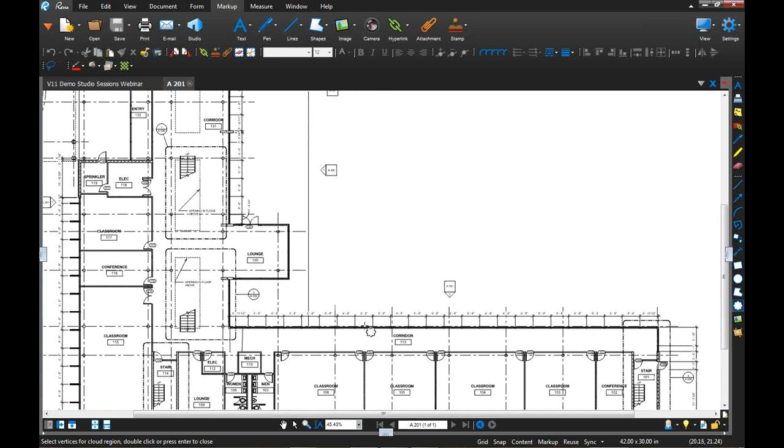Within my markup menu, I'm going to select my cloud tool, and zoom in and out of my drawing. With the wheel of my mouse I'm scrolling up and down, and if I click and hold the wheel, I can pan anywhere on my document. So I'll zoom into this corner of my drawing, click, drag and hold, and place my cloud.

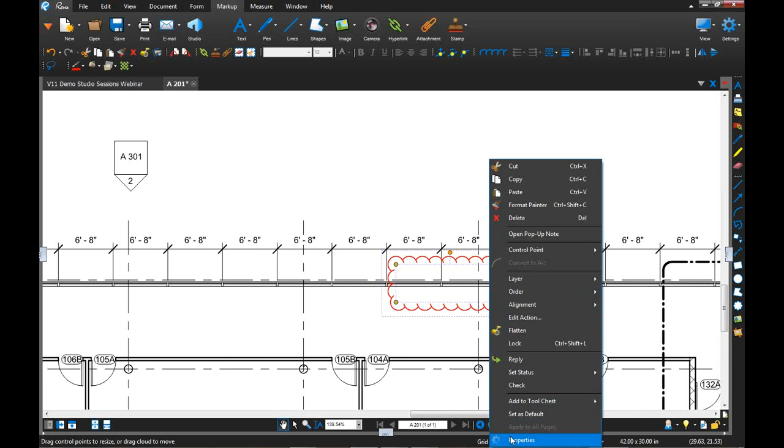I can easily change the attributes of my cloud. I'll right-click and open up my properties panel, which opens on the right side of my screen. I'll pull this out a bit more so you can view it. I can change the appearance color from red to a nice navy blue, and change the fill color to a nice canary yellow.

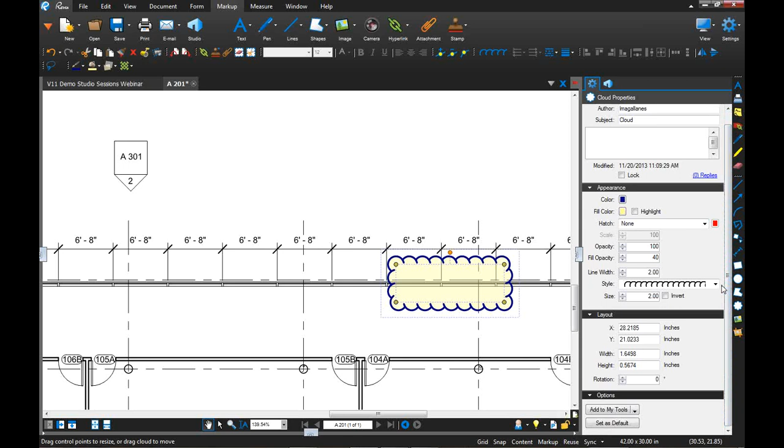But I also notice as I'm changing the attributes that the fill color is too strong, so I can change the opacity percentage. I'll click the down arrow and bring that to about 40%, so it's still eye-catching, showing there's a call-out here, but the viewer can still see the information underneath the cloud tool itself. I can also change the line width to make the blue line thicker, and change the style of the cloud as well.

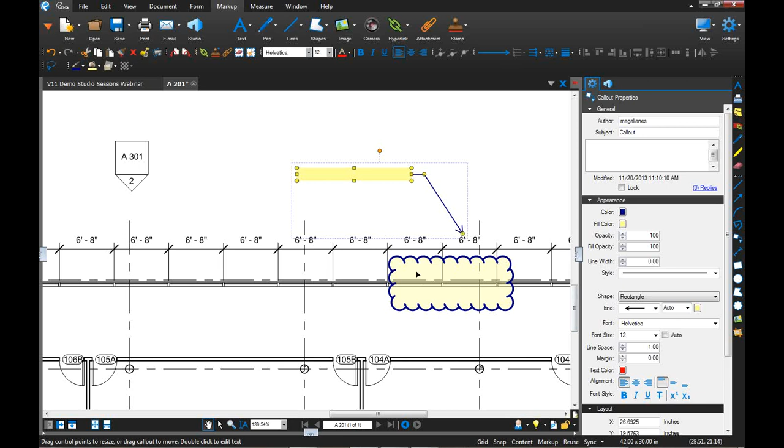Now that I created these tools, I can give them a group subject. I'll select my lasso tool, which happens to be my favorite, and change the subject name - just for this sample, we'll call it structural. Since I already did that before, it autofills for me, so I can just select what I just did.

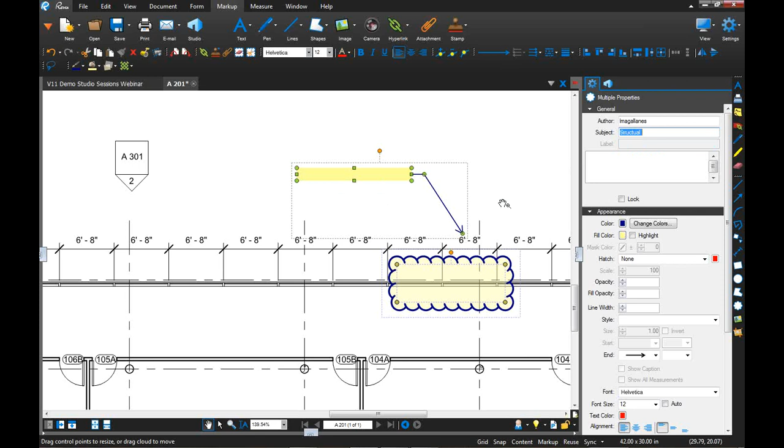Once I've selected them, I can right-click and add them to my tool chest. Let's say I want to add them to my engineers team tool chest, but I don't have one for engineers, so I can create one first before placing that markup on my tool chest.

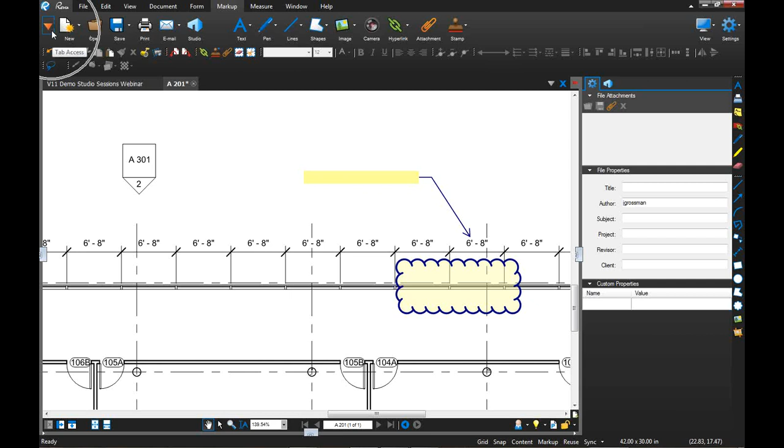I'm going to go into my Tab Access up here and click to open my tool chest, and notice how that opens up on the left panel of my screen. Then I'm going to go into my Manage Tools.

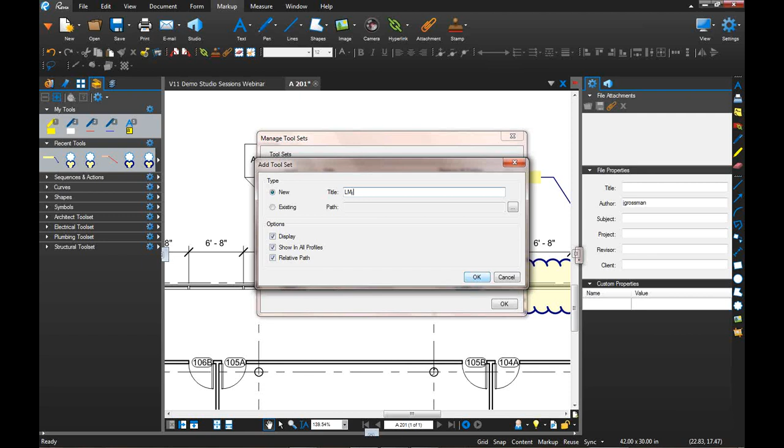These are the tool sets I already have existing, which you can see in my panel. So I'm going to go ahead and add my own tool chest, and I'll name it LM Team as an example. Then I'll click OK.

I'm going to save that to my local or C drive. Now notice that the LM tool chest has been added onto my tool sets, and you can see it here at the bottom of the dialog box.

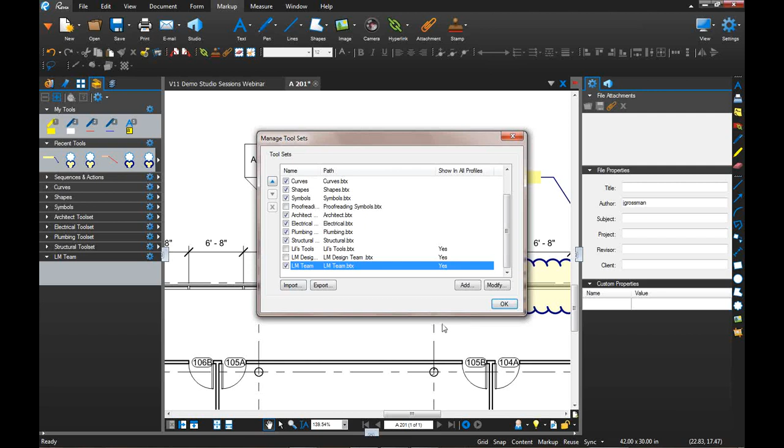I can also share the same tool chest. If I highlight on that tool chest, I can export it and save it to my local or C drive, then email the team to let them know it's located on drive P under folder tool chest. Once they have that information, they can open Revu, go into their Manage Toolsets dialog box, and click Import to bring that tool chest into their Revu. Now that I've created a tool chest, I'll click OK.

Now I'm going to add the markups I created a second ago and place them right into my tool chest. So I'll click on my markup to activate it, and now with my Properties panel open on the right side of my screen, I'll go down to the bottom where I have the option to add to my tool.

I'll click on the down arrow, and now I have that tool chest I created called LM Team. I'm going to add that to my tool chest. If you notice on the screen to my left, that markup is now placed in that same tool chest.

Also, if I created some markups, you'll notice I have a recent tools section. One thing to note is that the minute you close the session, the recent tools will go back to a clean slate. So if there are any tools or markups you're creating that you want to continue using, the best thing to do is create your tool chest and click on that markup to add it there.

So now you saw me add a markup either by right-clicking and adding to my tools, or by actually dragging it from my recent tools all the way down to my LM Team tool chest.

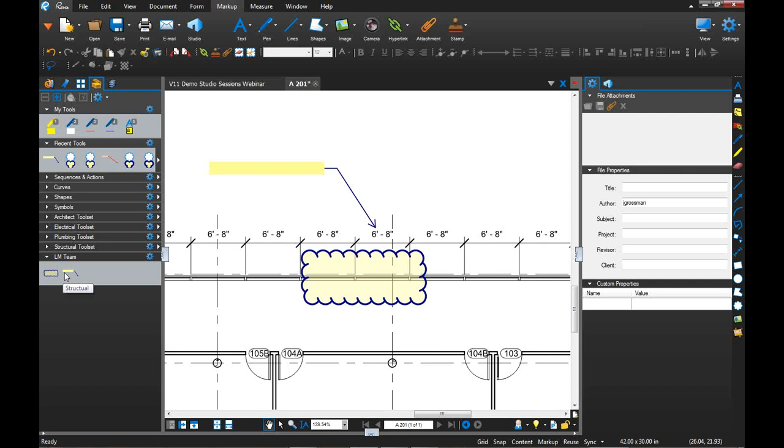Now I'm actually going to save this tool chest to my profile. I'll go back into View, and I'm in my design profile, so I'll go ahead and save it. The profile is a place where you can store, standardize, and set up your configured environment, and add any dependencies you might have linked. It also helps keep everything standardized in a uniform way.

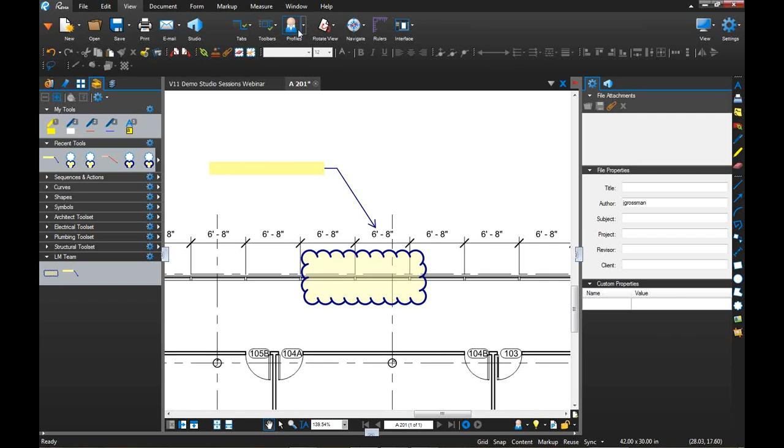So let's go back into profiles here, which is the little profile manager with a bow tie and a blue sweater. If I click on profiles, I can create my own customized profile. I'll click on Add, and we're going to name it LM Design Team Profile, then click OK.

Now you'll see it has populated itself on my profiles list, and it's actually alphabetized that for me right away, so it's in between my estimation and my office profile. I also have checked off to include dependencies, so if I share that with other team members, everything stays linked together.

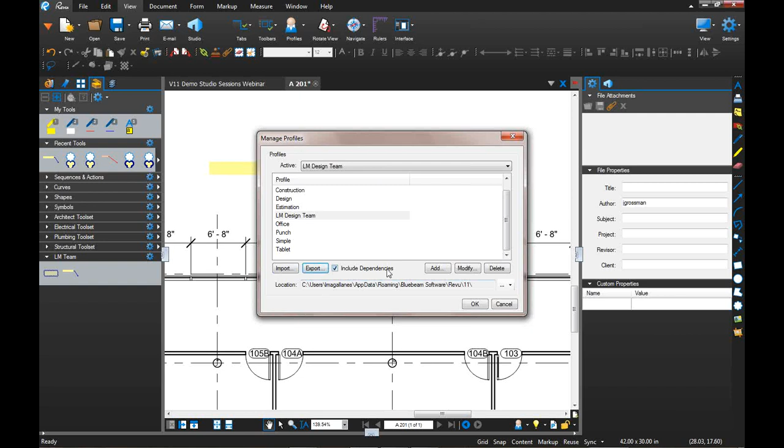Similar to the managed tool chest, I can export this profile and save it to my local or C drive. The other party will then come into Revu, open up their Manage Profiles dialog box, and import that profile into their Revu. Then they can click OK, and now I have that profile checked on currently.

So now we're actually going to go ahead and take a look at our markups list, which I'm going to open up from the blue knob here at the bottom panel. I'm going to click and drag it open. So I have these markup lists, and what you see so far are the markups that I've created so far along this document.

Think of the markup list, if you're familiar with Excel, as having columns and rows that you can work with. With Excel, you have a lot of flexibility with moving things around, very similar to your markup list.

So if I want my status to be placed towards the end of my markup list, I can grab on that status and just drag it over, very similar to Excel. I can also create my own custom columns and add my own formulas, again similar to Excel, where cell A1 multiplied by B1 gives me my sum in cell C1.

Just something to give you a little bit of something familiar. Here I can actually go ahead and display certain columns. So if I want to display my area column, notice how it's populated on my markup list here. And I can turn those on and off anytime - click it one too many times, and I can just turn that off again.

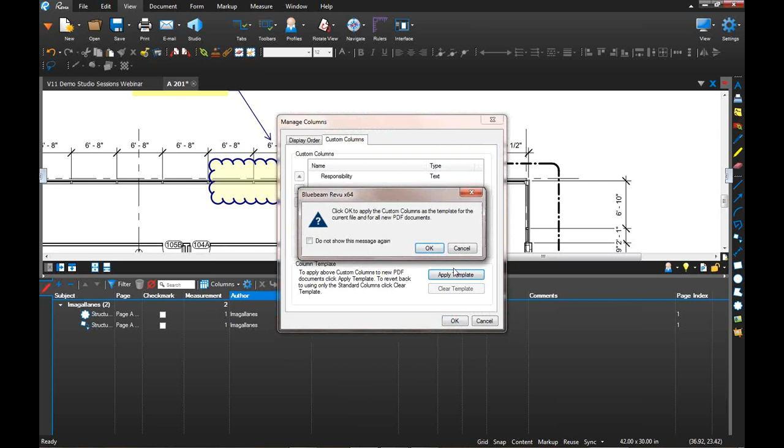So now that I'm here, I can actually apply this template to show in every new session that I have in Revu. I'm going to click OK. So every time I actually come to Revu, however I displayed all my custom columns and statuses, it would actually show for each new session of Revu. So I'm going to go ahead and click OK.

So now I'm going to look at, since I'm going to have a couple of people review this, I want to make sure I've set some of my statuses as well. I'm going to click on my Manage My Statuses. I already have two existing in my Manage status: Review and Migration. Under Review, I have the states accepted, rejected, canceled, completed, or none. For Migration, I have not confirmed, confirmed, and none.

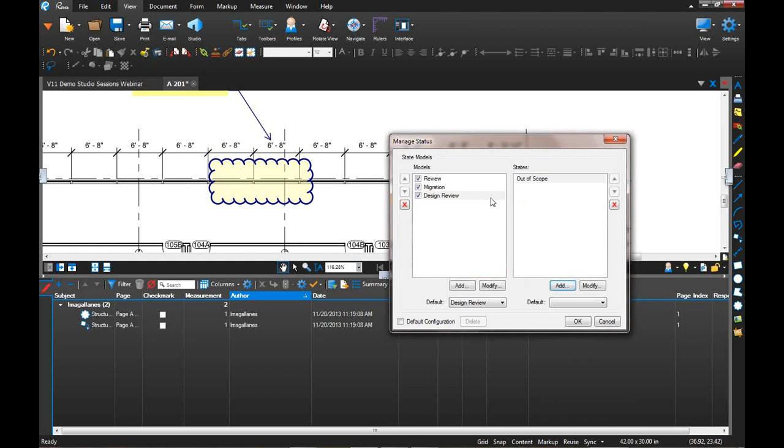But I want to go ahead and add a new one, so I'm going to click on Add. We're going to name this Design Review and click OK. And for Design Review, I'm going to add a state of out of scope, and then click OK from here. Then I'm going to check off the default configuration, and click OK after that.

So now I want to make sure those statuses are actually working within my markup list. I'm going to click on the status column, double click, and now I have that Design Review custom status that I just created, along with my out of scope state.

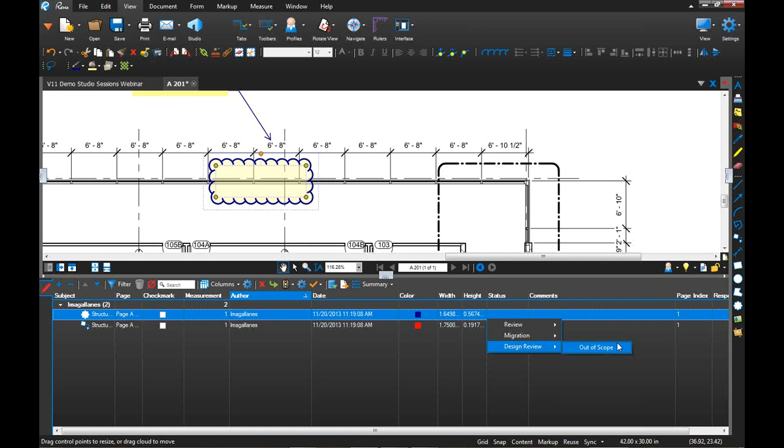So now we're ready to move into Studio. Once we have all our custom columns, statuses, and discipline-specific tools ready and set to be distributed to the team, we're going to jump into Studio, Bluebeam Studio.

We're going to go into the Studio icon, located on the top of my command bar. It's a blue box with a door opening. I'm going to click on that, and my Studio opens up on the right panel of my screen. We're going to start a new session.

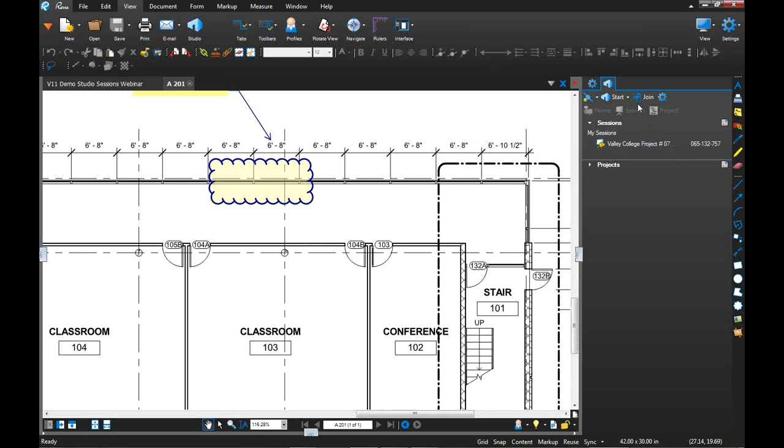I'm going to click on Start, New Session. You can go ahead and name your session, so I'll name this Design Review as an example. I'm going to add my files—not my slide file, but the sheet that I've already been marking up.

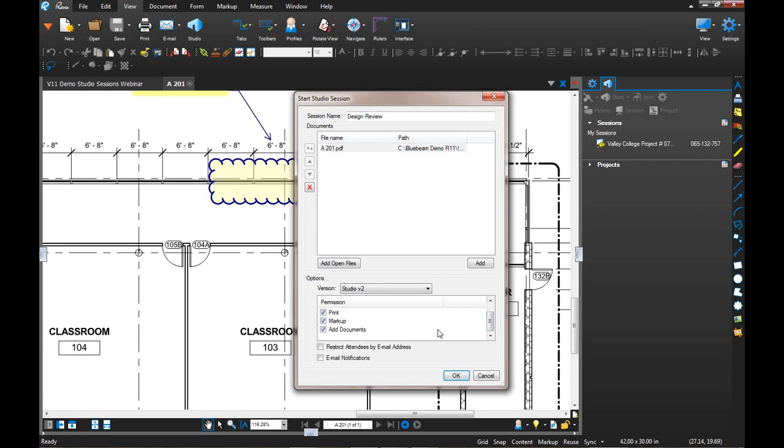From here I can set all my permissions. Let me open up the screen a bit more so I have the options to set permissions. I can allow attendees to save as, print, or mark, and I'm also going to allow them to add documents, but the choice is up to you to change those permissions accordingly.

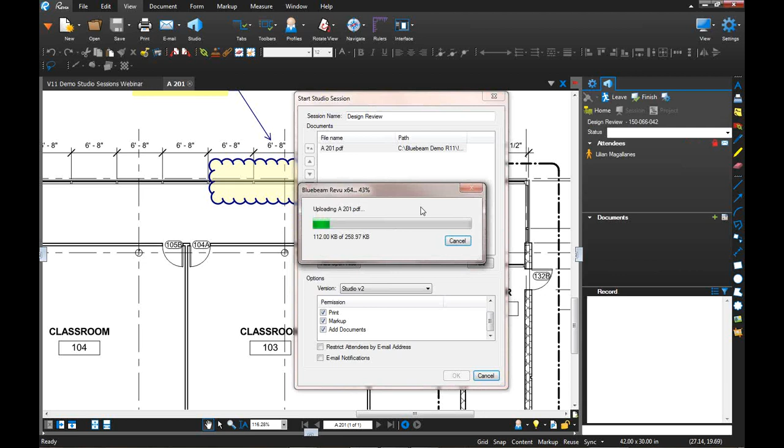Once I click OK, now that I have my files uploaded and permissions adjusted, I'm going to click OK. One thing before that—I can also restrict attendees by email address; in the next screen I'll show how that looks. But in this case, I'm not going to restrict anyone, so I'll click OK and it uploads the file.

From here I'm going to invite my attendees. In the previous screen, if I had restricted by email addresses, only those populated emails would be able to join the session. Think of it as a guest list—if they're not on it, they don't get in; if they are, they can jump into your session.

For this example, we're going to add an address. Since Steve Jones is here with me, I'm going to add him. I already had him saved because I had invited him before to a different Studio session. So I'm going to click OK.

I can go ahead and add as many attendees from here—up to 500 attendees. And I have the option to upload up to 100 files, no more than 100 megabytes each.

Once I've added my attendees, I can add a customized message. I'm going to say, 'Hi Steve! Can you please review these drawings?' with a nice sideways happy face. Then I'll click OK.

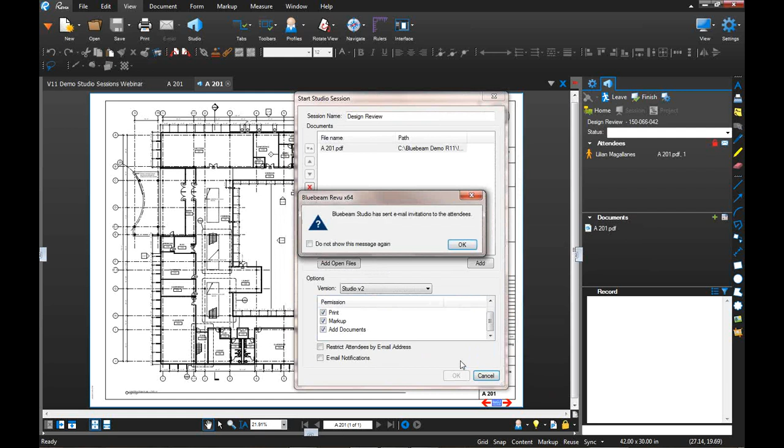So I click OK, and that invitation has been sent out to Steve. Now we're right into that Studio session, as you see here. But we already have a session that we started before, so we're going to jump into it since we have some activities on there already.

So I'm in this session called Valley College Project number 07134-10, B as in boy. I have here my session ID number, I can view that here. I can see all the attendees who have jumped into my session, and I can also see that our electrical, mechanical and plumbing guys have already jumped into the session.

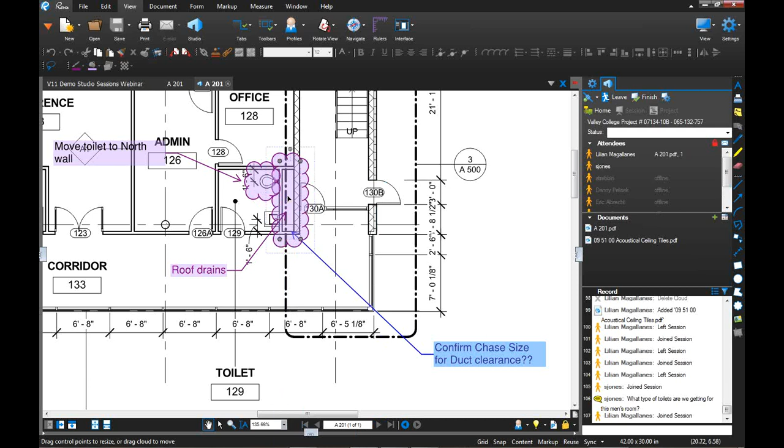If I zoom into one of these markups and I click and highlight it, you'll notice that it has those gray dots at each corner. I can't do anything with those markers, I can't move it, I can't enlarge that cloud. Something to note is that I cannot edit anyone else's markups but my own.

So if I create a cloud here, notice how they have those yellow dots. I can go ahead and change and reconfigure that cloud any way I like, and I can delete it if I want, because those are my markups. But anyone else's markups placed here in the studio session, I cannot change at all whatsoever.

Below here I have my record, so it gives me a record of anyone who came in and what activities they did while they were in the session. So say, for example, I see that Steve Jones was here earlier, and he's asking me a question.

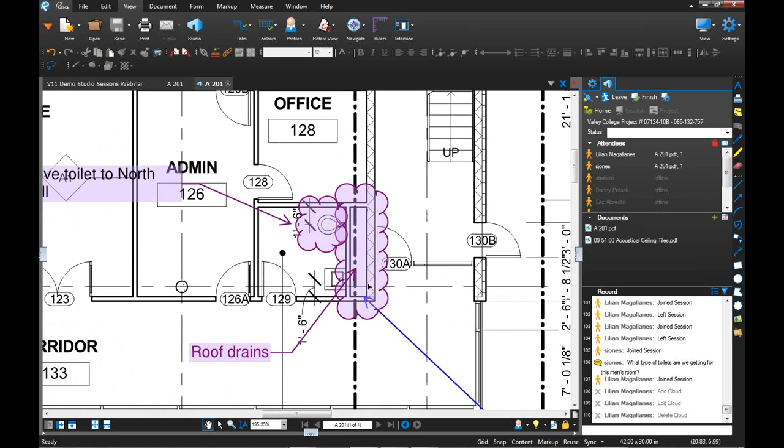What type of toilets are we getting for this men's room? If I zoom in, I'm seeing right away there's a toilet here, but it's not really a men's restroom. But I can click on that comment he made, and at the very moment he asked the question in the record box, it zooms into that location where he was posing that question. So it truly does give you that relevance of where they were, in that very place and time.

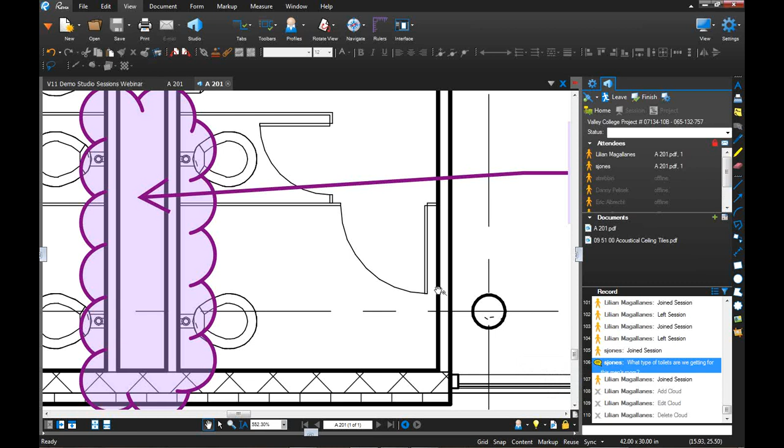So I can go ahead and leave the session. I'm sorry, I don't want to leave the session just yet, there's so much more to do here.

I saw Steve's markup, but I can also see that Steve is on the session as well. I can see that Danny and Eric have been in the session, but they're no longer here, because as I'm hovering over their names they've been grayed out. But I can see that Steve is actively on the session now, because his name went from that grayed out font type to white.

Notice as I hover over, I have these orange feet, and that tells me I can go ahead and follow him within the studio session. So if I click there, I am not touching the keyboard or the mouse. What I'm seeing at the moment is Steve actually reviewing the drawings himself, so I'm actually virtually following him at the moment.

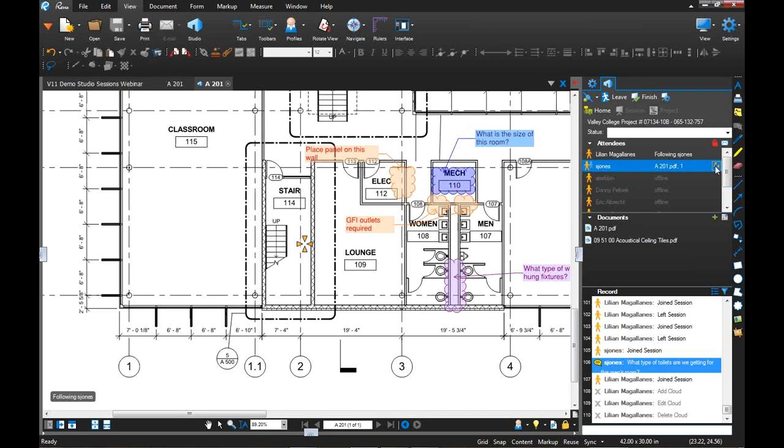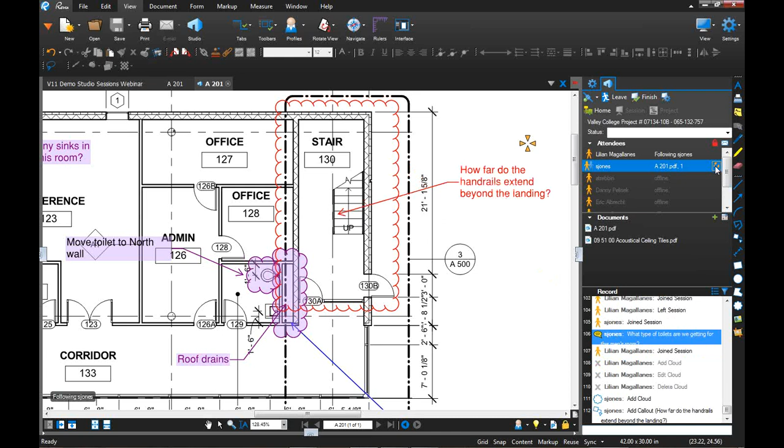This is actually really great. Steve and I were on the phone, and he has a question about the drawings, asking me about the height of these rails on these stairs. We have plenty of stairs here in the drawing, but if I'm on the phone and I follow him, I can exactly see where his train of thought is and what portion of the drawing he's referring to. It gives a really nice feel and flow to our communication, rather than saying, hold on Steve, where exactly are you again on the drawing, are you in the right corner, left corner, bottom half? It gives a nice flow while we're on the phone without having to interrupt each other and ask where we are in the drawing.

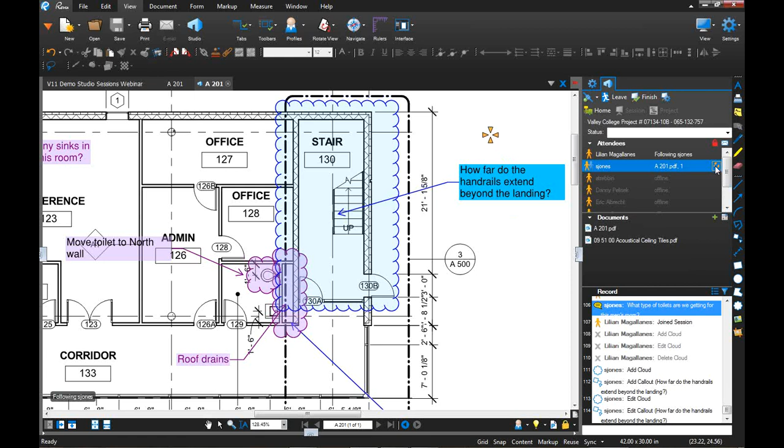Also, if I were to leave the session, Steve can go ahead and continue making his markup and adding his comments, which gives you the ability to truly collaborate and work together, and also the ability to work independently to place your comments and markups as you need to.

As I mentioned earlier, I'm actually going to go ahead and stop following Steve. Thank you, Steve. Go ahead and click back.

Okay, so earlier we created some statuses. If I open up my markup list, I actually went ahead and filtered them by subject, but I don't have to do that. I can go ahead and filter them either by viewing all, or filter them by subject. If I go into my status column, I can double click on my status, and I have my design review that I created earlier, then I also have the review. I'm going to click rejected for this status at the moment. One thing to note is that every time you put a status, it gives you a timestamp, so it says that I rejected it, and gives you the date and the time.

Let me open that a little bit further for you guys.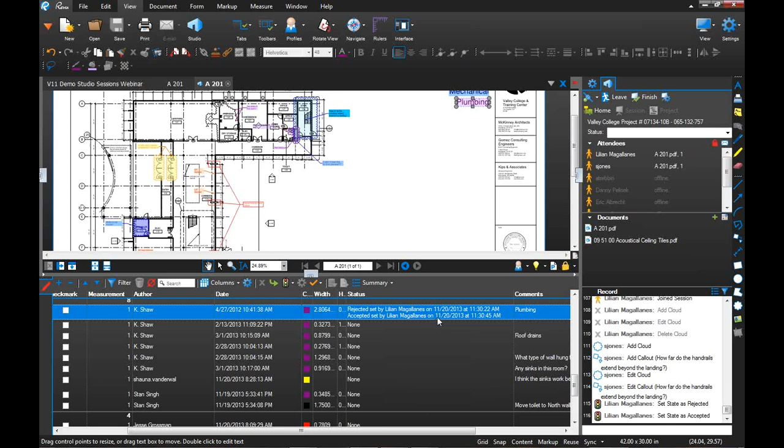If I come back in here and change that status to, say, accepted, you'll see it's actually stacking all the status changes for you, building up those additional statuses. So there's never a question of who said what, who rejected, or who canceled. It stacks them up and keeps that record in the status columns.

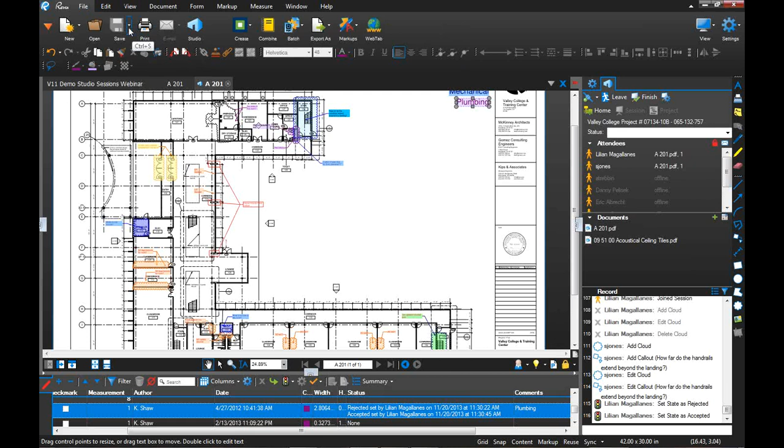So what happens when the comments are placed and revisions have been issued? What's next? I'm going to show you how to download this drawing that we have on the studio locally. I'll go into my command bar menu, into File, then click Save As, and save this drawing locally on my desktop.

Of course, you may have some type of standard naming convention, so I'll go ahead and put an underscore, studio comments, and save that to my local desktop.

Now notice I have a new file placed here, and on the tab it has the new file name I just gave it. It no longer has that studio blue box with the door icon, because this is now my own local saved copy.

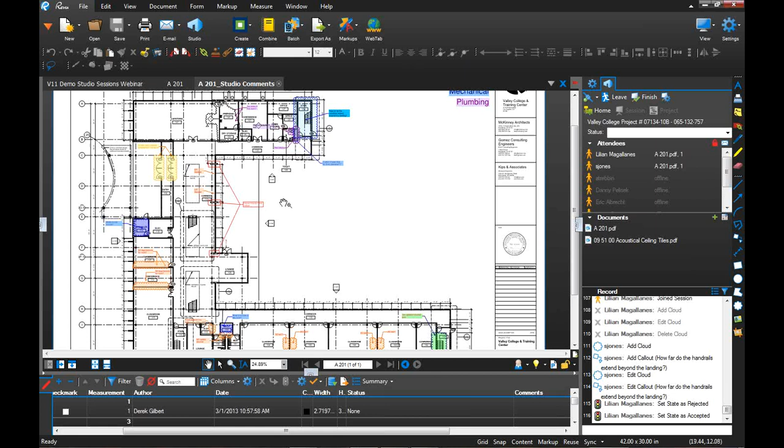From here, there's been a new sheet issued out - let's say revision 2 is out. I can slip sheet this drawing by going into my Documents menu, clicking on my pages, and then I'm going to replace the pages.

I'm going to update the new drawing sheet with revision 2, but keep all those comments on top so we can continue building on that. I'll click Replace and go ahead and find revision 2.

So A201 revision 2 has been issued. I'll click Open, and now in here I have my Replace Pages menu. I have my current page, file name A201_studio comments, which I'm going to replace with my A201 revision 2 PDF - page 1 of 1.

If I wanted to replace just one page out of a file of page 1 through 20, I would select page 5, and if page 5 is in the same location on the new file, it would be page 5 as well. I'll go ahead and click OK.

Now I have the new updated drawing underneath, and I still have all of my markups on my drawing - so I've only replaced the page content. The next thing to do would be to place all of those markups into a layer.

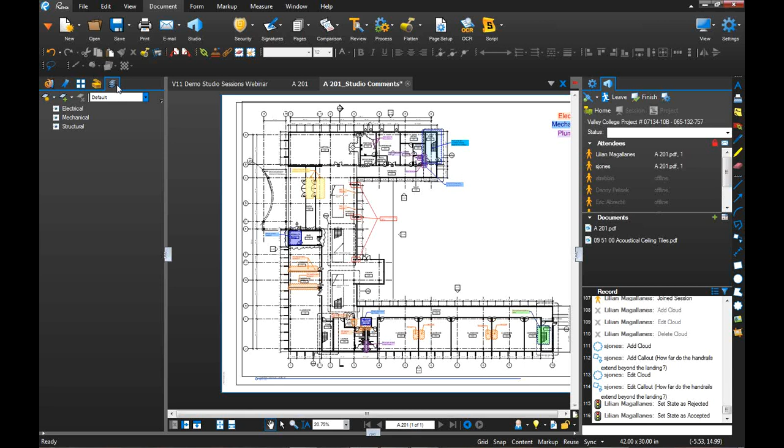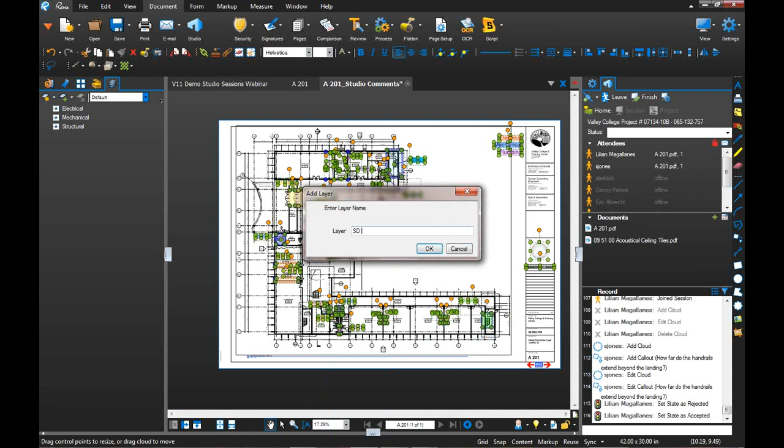So what I can do is say, well, these are all of my schematic design comments and markups. I'll click Control A on my keyboard to select all those markups, then right-click on any markup and create a new layer, naming it my SD layer. Then I'll click OK.

Now I have my SD layer, and I can turn that off, leaving a clean sheet of my A201 revision 2. But I can go ahead and turn on those comments and markups that were created in the studio session.

Now the next thing from here, you can go ahead and upload it, because I have the ability as a host, but I've also given the same permission to all of my attendees. As I showed earlier how to set up a new session, I can add this file into that same studio session.

There's no limit or cap on the number of sessions you can create. As I mentioned earlier, you can invite up to 500 attendees, and you can add up to 100 files, as long as they're no larger than 100 megabytes each.

So you can either go ahead and add a new session from here and re-invite your attendees, or go ahead and add it to your existing studio.

During the live session, it really stays open as long as there's activity. So whether there's activity for 1 week, 2 weeks, 3 weeks, a month, 6 months, as long as there's activity or comments being placed, that session will continue to stay open.

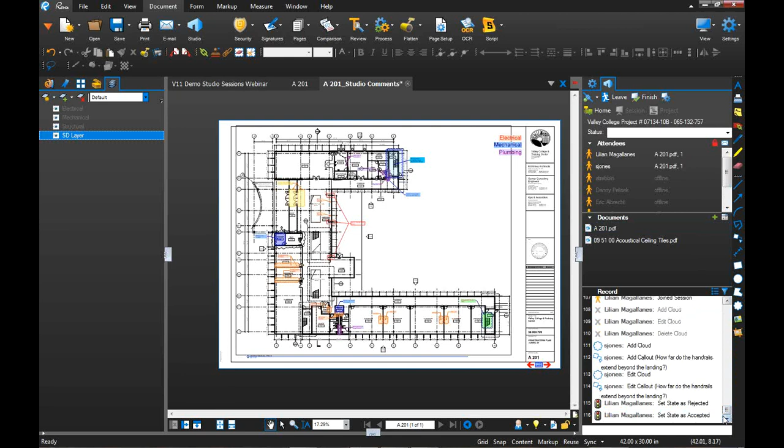Something to keep in mind is that the longer the session, the larger your record will grow. So when you actually go and create that session report, there will be some time you may have to allow to download all the information. It's probably best practice to add that revised drawing to a new session, so you're not dealing with the downside of downloading such a long report.

With the session report here, I've brought up my session report dialog box. I have the option at any time during the session or at the end of the session to create a report. I have 3 choices: a record summary, a PDF package report, or a combined files report. I personally like the PDF package report, and I'll show you how that looks in a minute.

I can add any notes on there regarding the session, and I can check off anything that I want to or don't want to see in the session.

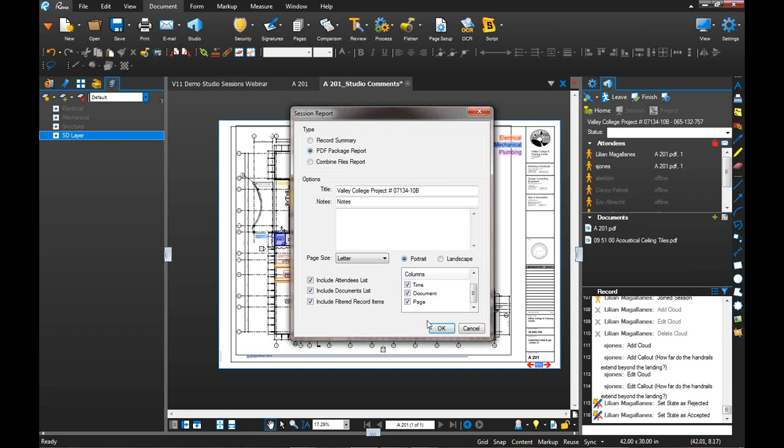Once I click OK, that's going to take a couple of seconds to download. First I have to save it to my desktop, so I'm going to go ahead and save it here, click Save. And now it's actually generated a PDF package report.

What you see here are the actual documents that have been placed up in the studio session, along with the report. So I'm going to go ahead and open the report.

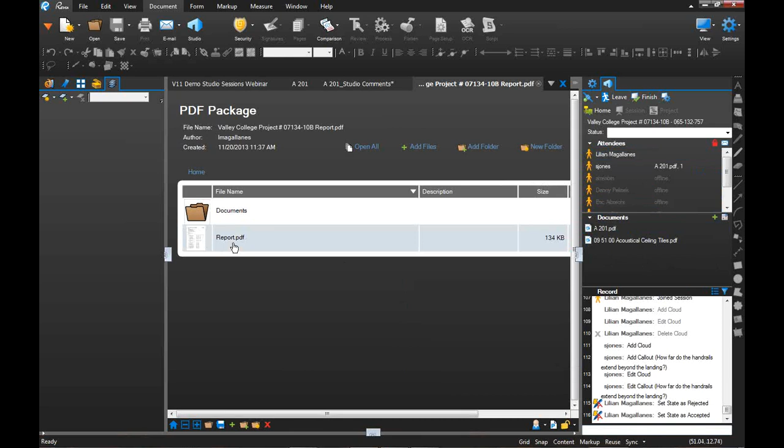Again, this is just another level of accountability to see who attended the session and keep a record of who did what. I see that these are all of my attendees, and these are the documents that were viewed in this session. I keep the record of who did what and at what time, with timestamps for me to see.

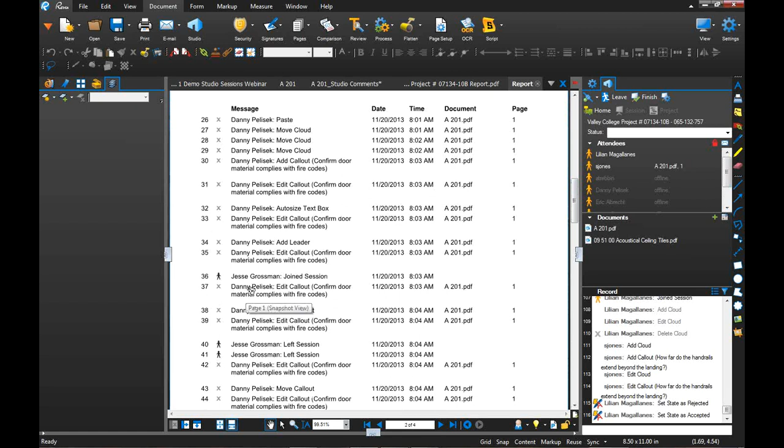Also, if I see Danny edited a call out, it actually comes already hyperlinked with the drawing of the studio session document. So if I click on it to see that call out, it takes me right back into the drawing that Danny edited that call out.

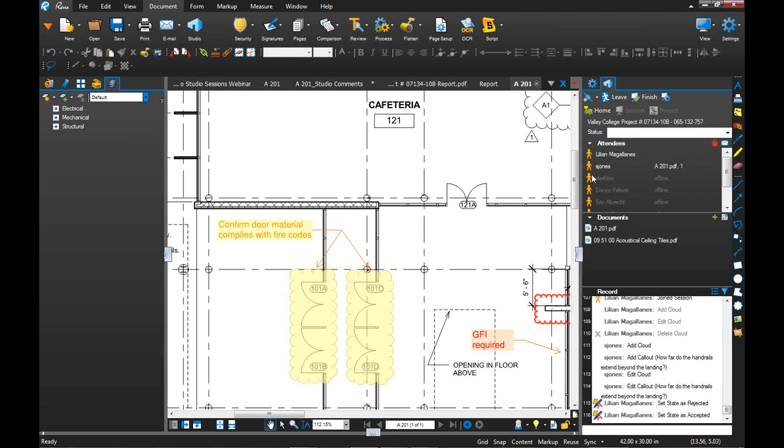In the meantime, while we're waiting on questions, Lilian, one common question we get from a lot of users is if you want to invite users to join a studio session or project with you who do not own Bluebeam Revu, is there a way to do that? Can you invite, for example, if a GC wants to invite his subs to a studio session who do not have Bluebeam, how are you able to do that?

Yeah, if they don't have a registered copy of Bluebeam Revu, they can certainly download our free viewer called Bluebeam View. So in the actual invitation that gets sent out from a studio session, there's a link to the studio session, but there's also a link in the same email invite to download Bluebeam View.

And the great thing about that is when folks join a studio session or project using the free viewer, as long as they are taking part in that studio session or project, they're going to have all of the markup tools and capabilities that someone would have even if they owned a full seat of Revu. So essentially their free viewer unlocks into almost the full capabilities of Revu.

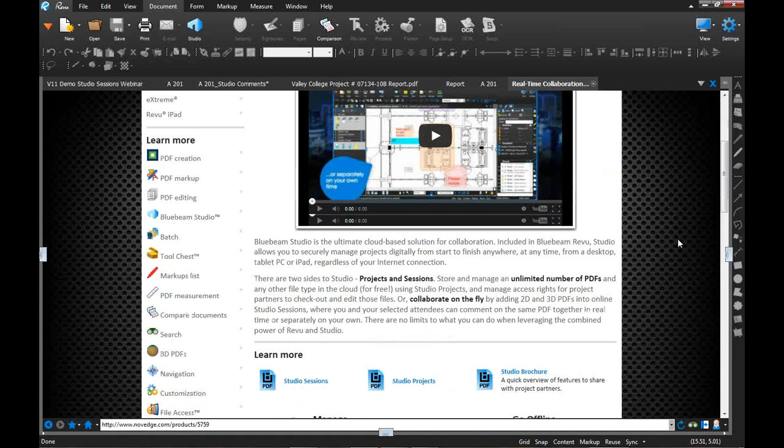Yeah, I'm definitely going to do that. So on my screen, you actually see the Bluebeam Studio. If there's any more information you want to know about Bluebeam Studio itself, if you want to remember those 500 and 100 file limits, it's right here on the screen.

But if I go back to the top of my web page and click on Bluebeam University, we have tons and tons of short videos that will definitely show you how to do this. So in this case for Studio, we will find it under Advanced Studies. So here we go.

So we have a couple of pre-recorded videos about Bluebeam Studio. This is really great because you can view short 5-minute snippets about specific features, all the way to longer, more extended hour-long recorded webinars about specific topics. So if you're looking to find more information about how Bluebeam and Studio work, this is a great resource for you.